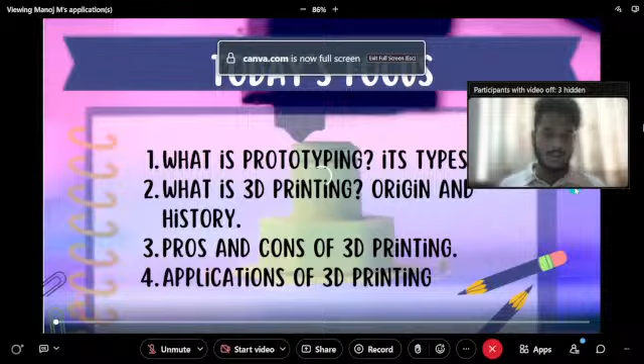Okay, so we have completed with the designing part, now it's about prototyping. So today we'll be focusing on what is prototyping, its types, and then what is 3D printing, about its origin as well as its history. Each and every component we use in our day-to-day life has some history behind it. Let's also look into the advantages and disadvantages of 3D printing, and then at the end let's discuss the applications of 3D printing.

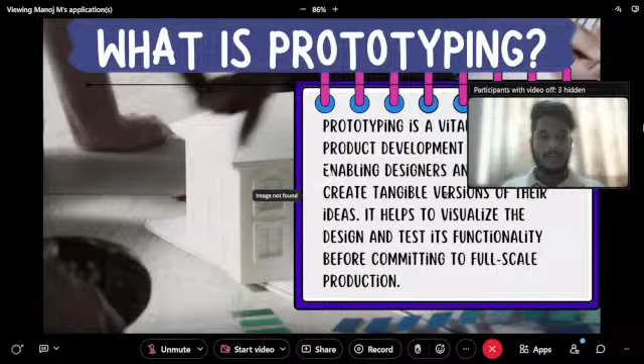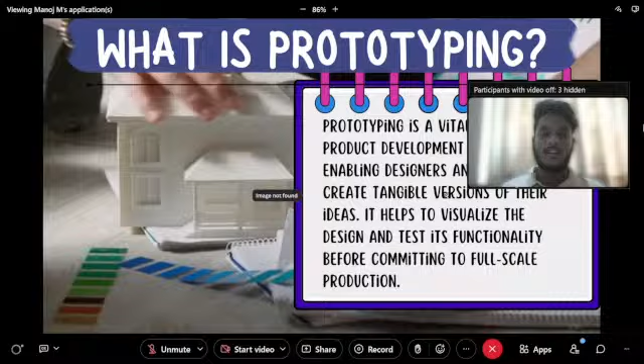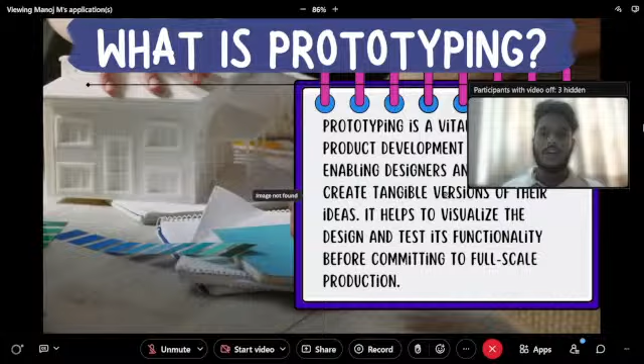So now does anybody know what is prototyping? If you know, you can drop some text onto your chat box. So yeah, prototyping is nothing but designing some machine, for example some car. For that car, we need to know how it works, because before sending it to a mass production factory, we have to test that particular car. That's how each and every machine in our day-to-day life has been manufactured. First they'll be making a prototype of that similar model, and only if that works, they'll move on to the full scale production part.

So now you know what is prototyping, and now let's see the different types of manufacturing. Among them we have two major types, additive manufacturing and subtractive manufacturing. In additive manufacturing, we'll be adding materials layer by layer and moving the manufacturing process ahead. In subtractive manufacturing, there will be a particular beam or sheet of material, and that material's edges will be removed to give shape to the machine. In additive manufacturing, layers are added one over the other, so there is not much material wastage. In subtractive manufacturing, you can see materials are getting wasted as we remove material to give it shape.

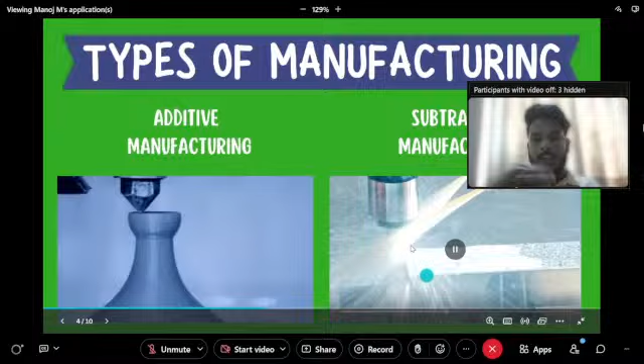Okay, so now we got to know the difference between additive manufacturing and subtractive manufacturing. Now moving on to the next slide.

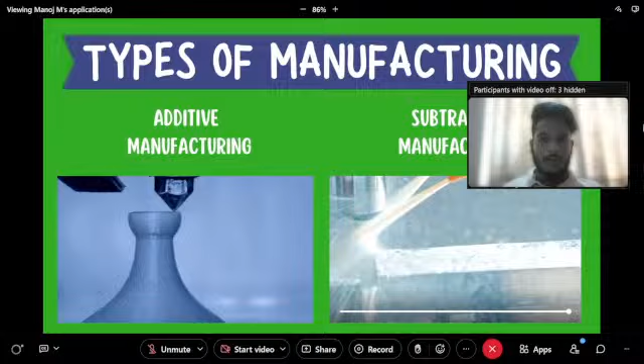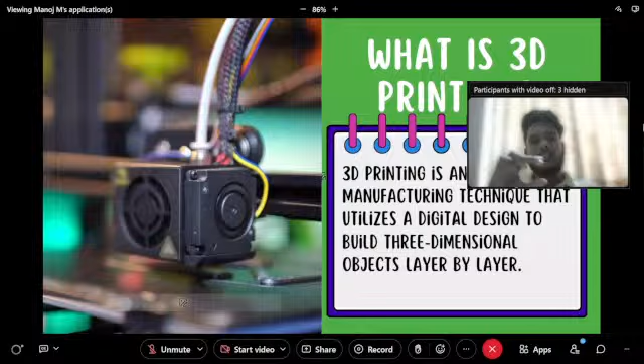Let's see what is 3D printing. 3D printing is an innovative manufacturing technique. Here what we do is take a 3D model, meaning it has length, breadth, as well as thickness, and we print that product. The product is manufactured in a layer by layer process: first one layer is printed, above that another layer, and so on. As we add layers, the thickness increases, and that's how we get the 3D printed model.

Now let's look into the history part. In 1983, Hideo Kodama had patented a model where he had manufactured using a resin.

Resin is nothing but a liquid. That liquid resin and some hardener will be put in and mixed together, and then they apply UV light, meaning ultraviolet light. There are different types of light rays from the sun - we have ultraviolet rays, IR rays, and multiple other lights. Using UV light, that particular liquid model was solidified. Solidifying means the liquid is turned into another state of matter called solid - liquid to solid.

Then in 1986, stereolithography was invented. Here what happens is they'll put the mold, and into that mold, some resin and hardener are put in. There is a laser light which travels across that model shape, and wherever the laser light falls, that particular portion becomes hard. So we can get that product out of that design through this manufacturing process.

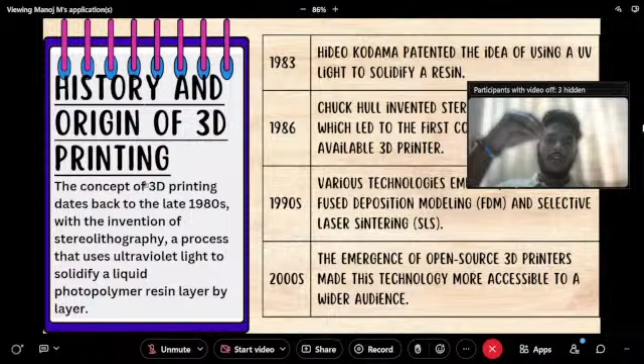In selective laser sintering, there is a powdered material which will be rolled into the mold - mold being the shape of that product. Onto that powder, laser light will be traced. When the laser light traces around that model, the fine powdered particles turn into liquid, and later on all those matters combine together and form into that particular model or product.

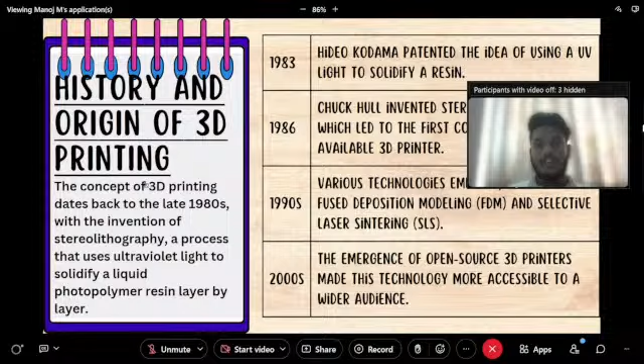Later on in the 2000s, the 3D printer was being manufactured on a small scale. The fused deposition modeling, which was huge, was made compact - meaning made small and handy. Those are the 3D printers available in your schools. A few schools are still not using 3D printers, but by the end of the session, you'll have some idea how to use it.

Now let's see the flowchart of the procedure for manufacturing. First we need the design. Where does the design come from? We have something called design thinking, where you find a problem, find a solution for that problem, and then design a product for that solution to work - that's the design thinking procedure.

For that design, if we require a 3D model, the first step we had done was 2D drawing - two-dimensional drawing - in the previous session. That two-dimensional drawing is done first, then out of that we make a three-dimensional model, in which we had used Tinkercad - though it's not just Tinkercad.

We'll also be using some softwares called Solid Edge, SolidWorks, Fusion 360, and CATIA. There are multiple designing softwares across the internet. So why am I choosing Tinkercad software? Because Tinkercad is the basic designing platform. Once you learn the basic concepts of designing using Tinkercad, you'll be able to do the next high-end softwares later on.

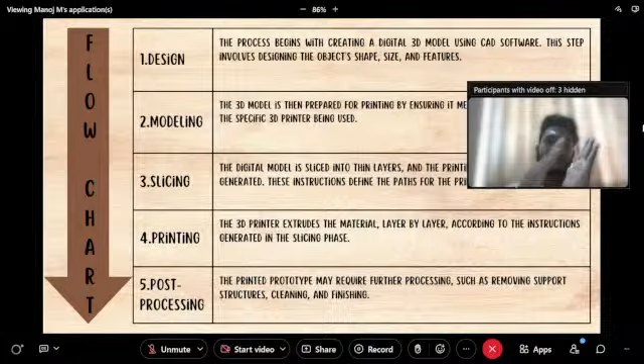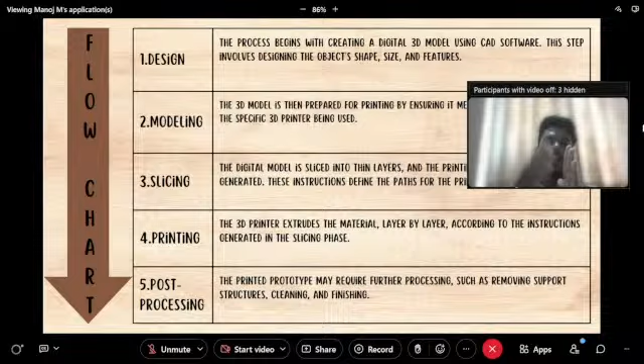You have mangoes and all, right? You won't eat the mangoes directly, you'll be cutting them. Similarly, we'll be cutting the design. If the thickness is so much, we'll be cutting it into slices, just like how we cut a cake. That's called slicing.

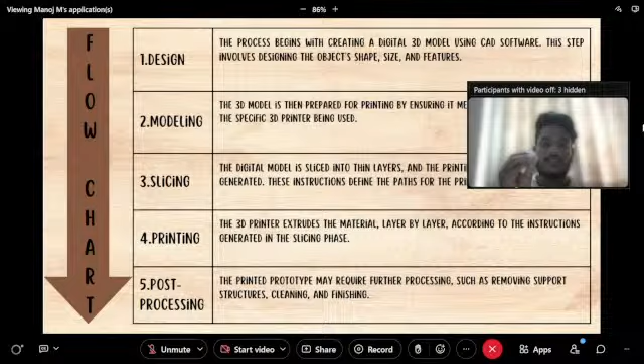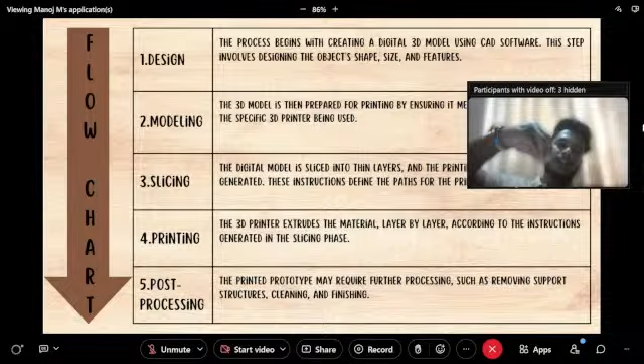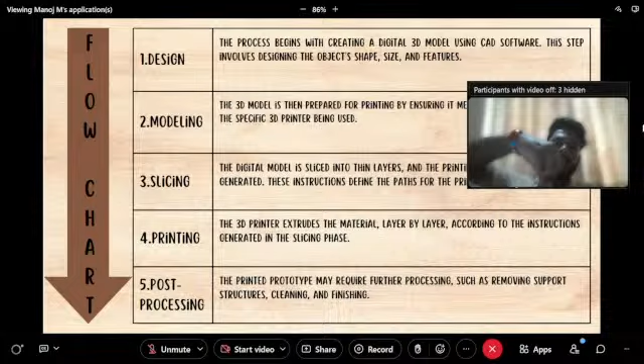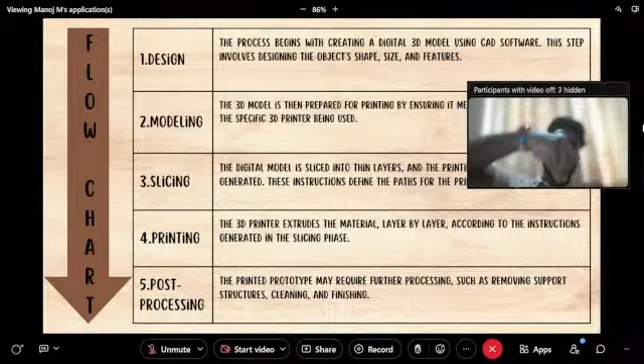Once the slicing is done, we'll give that product for printing. We'll take the G-codes, and using a pen drive, we'll transfer the G-codes to the printer. What the printer does is, in the slicing software, it generates a G-code in such a way that it tells where the nozzle and the bed should move. Each nozzle movement, which direction it should move to obtain that particular model, is decided using the slicing software. So with those G-codes, the nozzle and the bed will move, and once that moves, the printing starts.

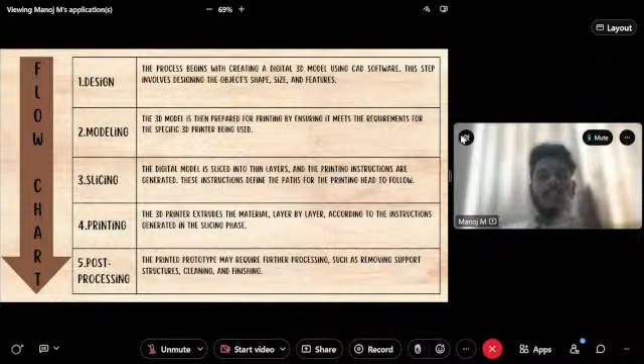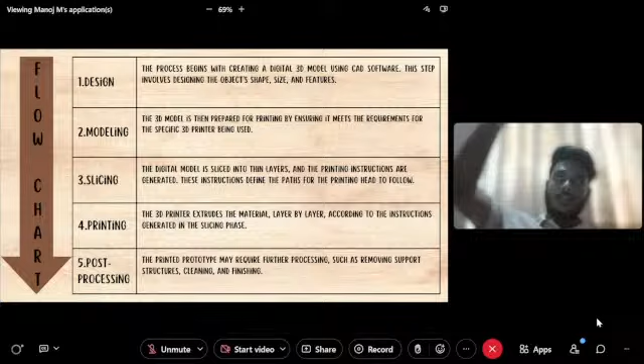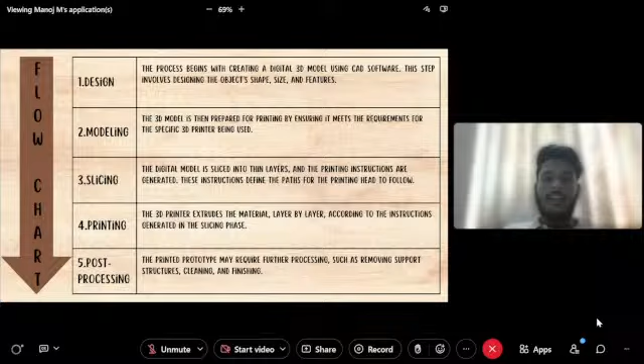Once the printing is done, the next process is called post-processing. Post-processing is nothing but removing some skirts or brims that were provided for holding the design onto the bed, and if there are supports, we remove those too. We give supports just like when building a home, you see some rods kept to hold the molding part until it dries. Similar kinds of supports are given in 3D printing also.

Now let's look into the advantages and disadvantages of 3D printing. When it comes to advantages, the first thing is rapid prototyping. Rapid prototyping means we can get the prototype done within a few hours. When it comes to other types of manufacturing like casting and molding, we need to prepare the mold first and then make the design, which takes about a week to get a prototype.

When it comes to 3D printing, we can get the model done within a maximum of 1 day. If it's complex, it may take 1 or 2 days. If it's simple, you can get it within hours. So what happens is we get an idea of how the final product looks like using a 3D printer. Got it? So the next thing is design flexibility.

However complex the design is, you can get it 3D printed easily.

Next is reduced cost. This applies just for making one prototype. With other types of manufacturing, it might cost more for just one model, and the amount could go even higher. So here, the cost will be low.

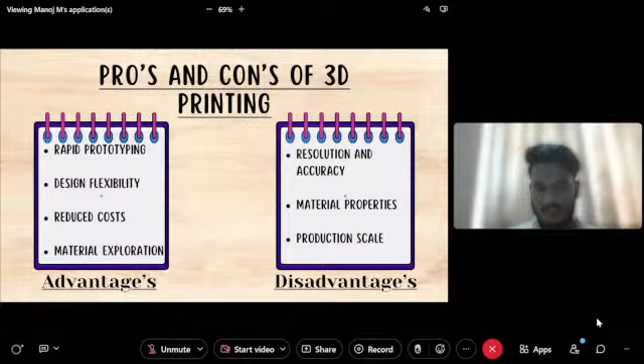So now we just saw the advantages and disadvantages. Now let's move on to the application part - for what purpose can you use the 3D printer, that's called application.

First is prototyping. If you want to do a major project and know how it looks in the final production, you can test it using the 3D printing procedure.

Next, healthcare. For example, if you are making a prosthetic hand or leg, all those things you can do using 3D printing.

Next, education. Now in all your schools we have 3D printing, right? That's also an educational part - we are learning hands-on experience using these 3D printers.

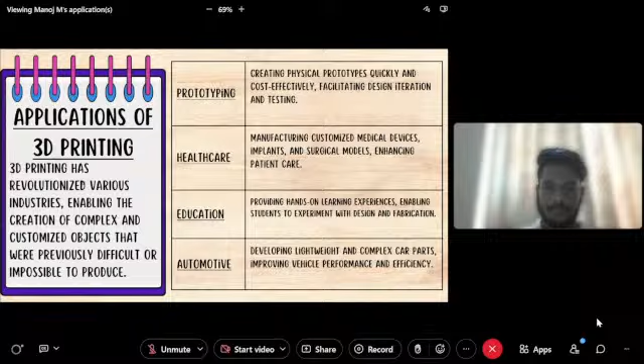Then when it comes to automotive, we can see dashboards and lightweight parts - all those things we can 3D print. So that's it for the presentation.

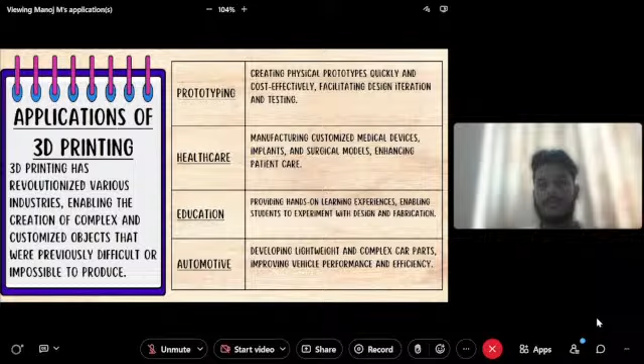Now let's move on to how we have to do the slicing procedure. Last week, what did we see? We saw the designing, right? So in Tinkercad, we designed some product here.

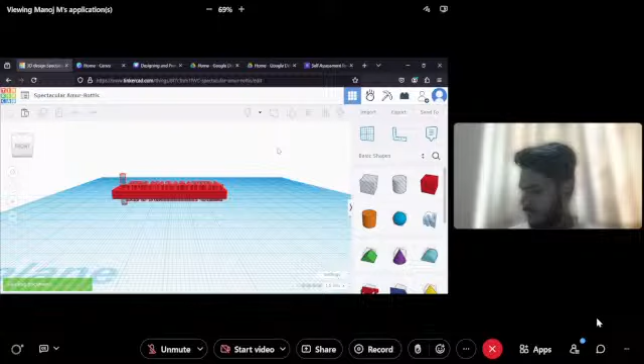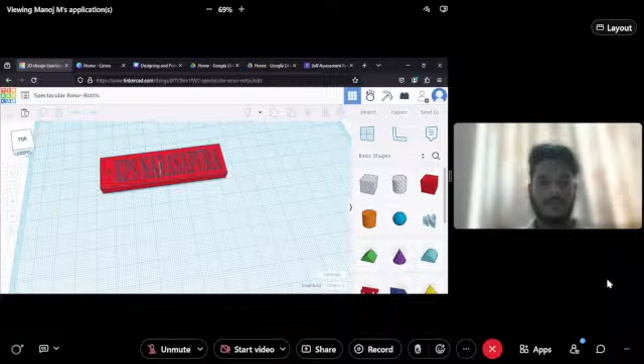So this was designed in our last session, right? We did it till here. Now what we'll do is I'll show you how to export this design, and also how to use that exported design for 3D printing. Let's move to the next part - this was the design we did previously.

Now what I'll do is go to the export option here. You have to click on export, then you can see options for 3D print. There are multiple file types like .obj, .gltf, and .stl. Most printers use the .stl file, so let's use that to download it. Now I'll download the file - it's completed now.

So then what you have to do is open the file. We had downloaded the model, right? So you have to click on that.

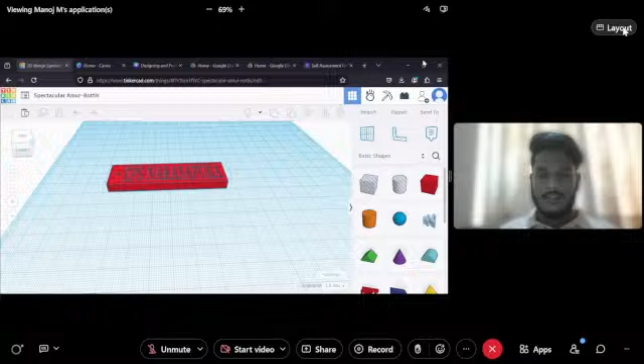Is the screen visible now? Yeah, now okay.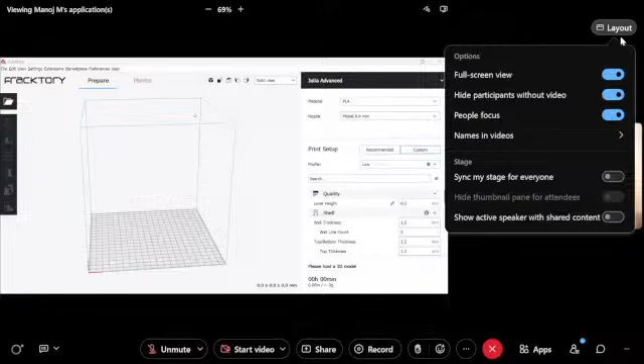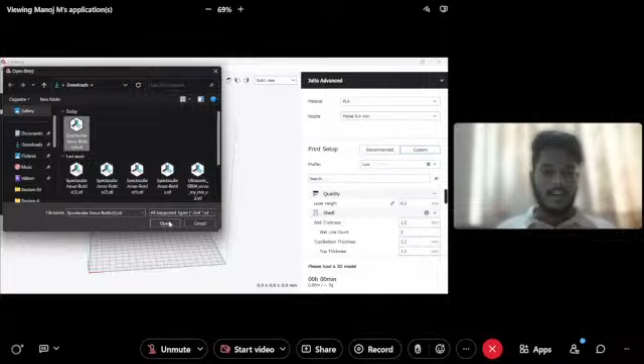So now this is how the interface looks like. Here you can see open file option. Once you click on open file, you'll see the downloaded file. You have to click that and open. That's it, so the design will be on this workspace.

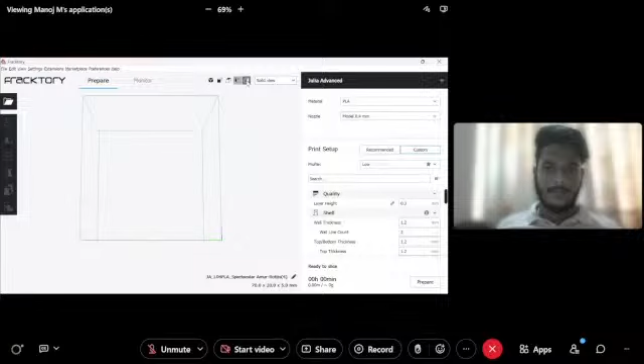Now let's see how to view it in different angles. Here you can see there are so many views. This is the front view, this is how it looks. This is the top view. This is side view, and this is the other side view.

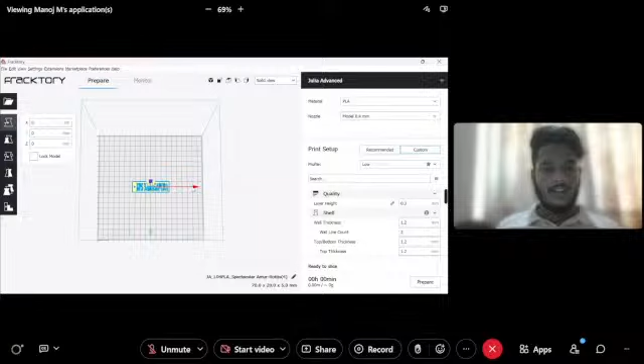Now let's open the top view and check. When I click on this, all these options get activated. This is the move option. Here you can see the arrow - you can click on the arrow and move it, and place it wherever you want.

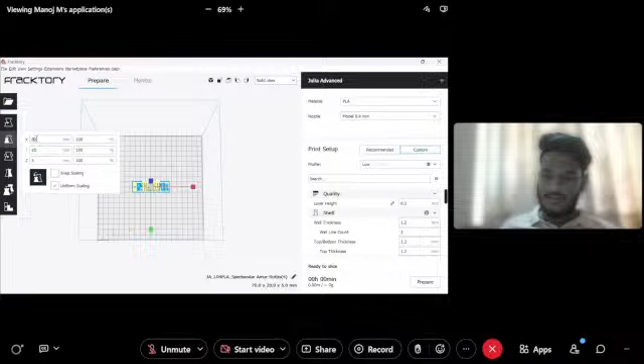Then there is something called scale. Scale is for increasing the size of the product. You can go here - the length was 70, right? Now I'll make it 80. You can see the length being increased. Now I'll set this back to 70. So here you can do the scaling part.

Then if you want to rotate that, you can rotate it in this way. Just rotate like this. Then give print command to the 3D printer.

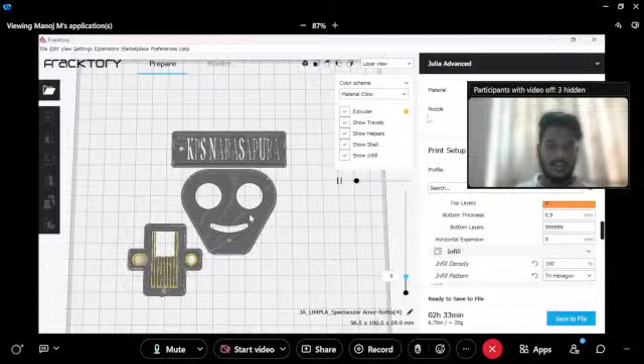Now I'll ask Venkatesh to share his screen. Yes, yes, Venkatesh, you stop the video. Yes, yes.

A student like you all - he does 3D printing and all in his school. So even you can also try all those things.

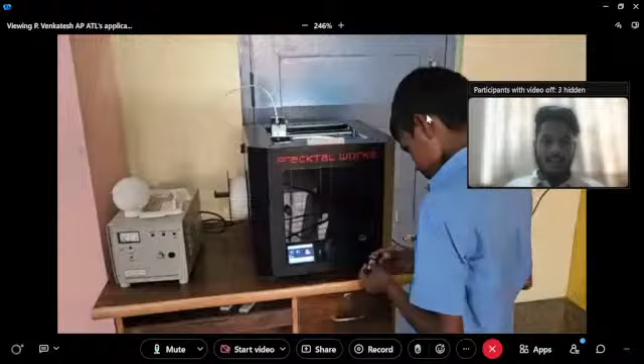So what I did, I just saved that file as G code and transferred it to the pen drive. Then I turned on the 3D printer and inserted that 3D printing pen drive.

Here I'll show you the settings options. In settings, you can see there are so many options available, like you can connect your mobile, and if you want to change your display, you can change your display theme. So all those things you have to scroll and check.

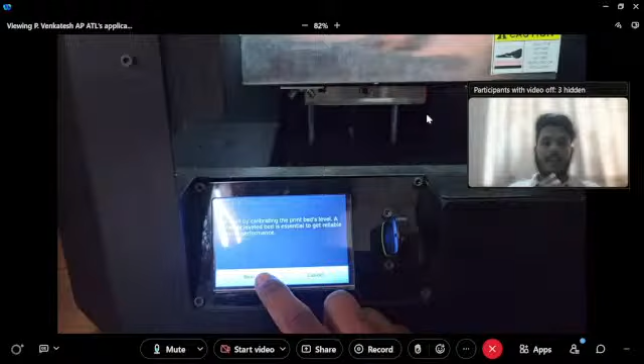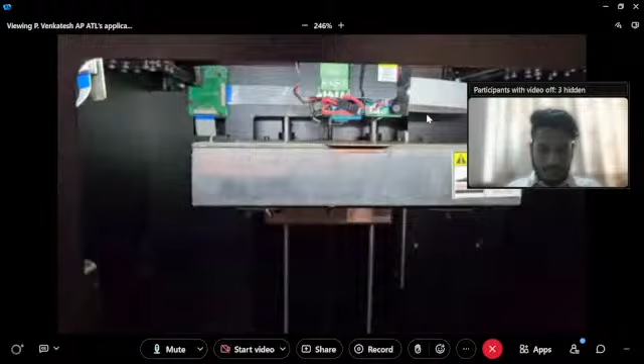Next part is calibration. Calibration is - for example, if it's not calibrated, what happens is, just imagine the bed... pause bro, touch bro. This is called the bed.

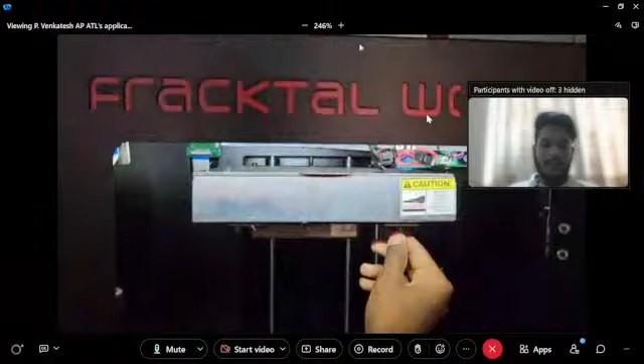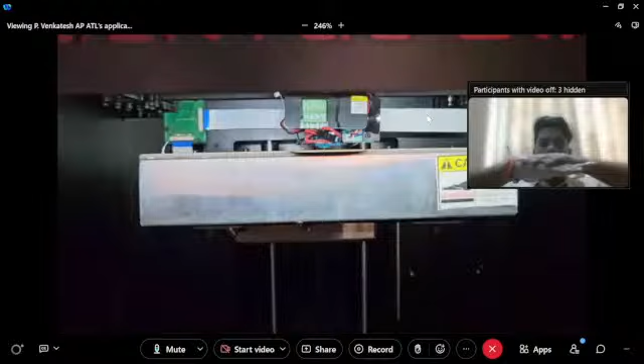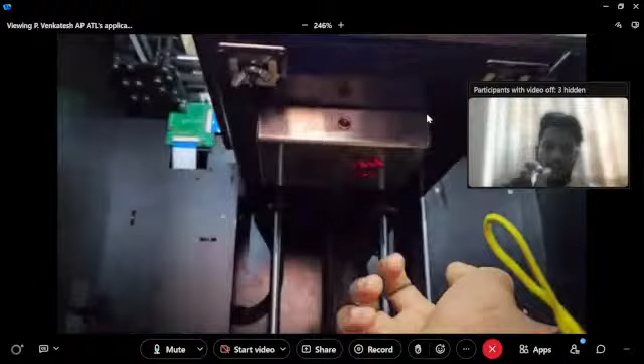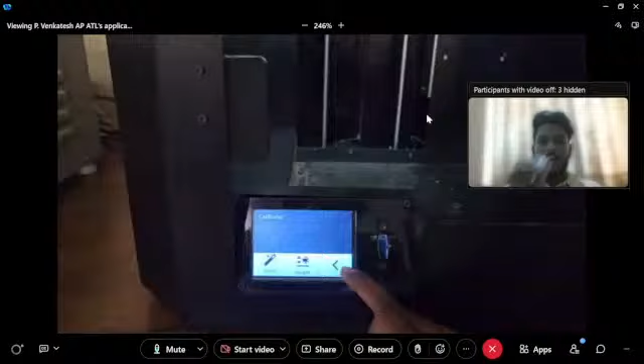If the bed is a bit tilted, the nozzle will be moving here and there. If it's not kept properly straight, the printing won't be effective. So there are screws - when you rotate those screws, this LED will turn on. Similarly, at all the edges there will be screws. You have to screw it up and see if the LED is turning on.

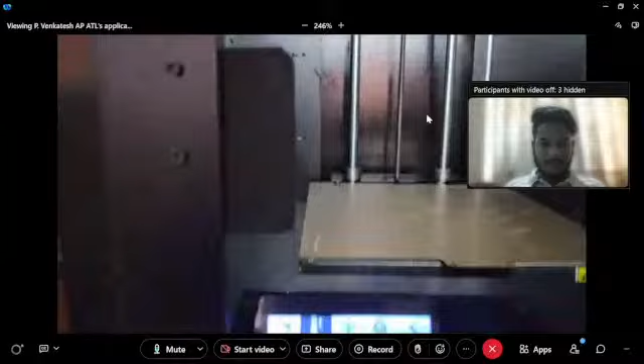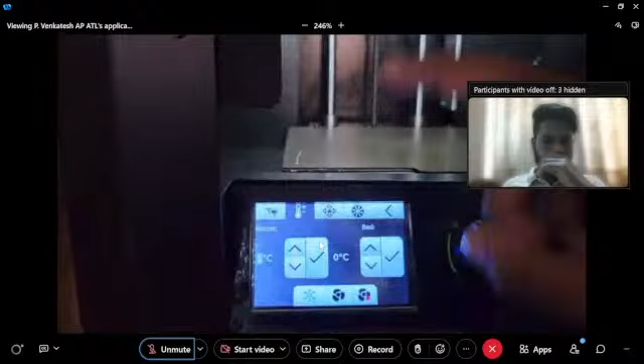Now we will see how to set the temperature. This was the nozzle, this is the bed. Both nozzle and bed will have some temperature. The nozzle will be around 220 to 240 degrees Celsius for PLA material. When it comes to the bed, it will be around 60 to 80 degrees Celsius. You have to set that and leave it.

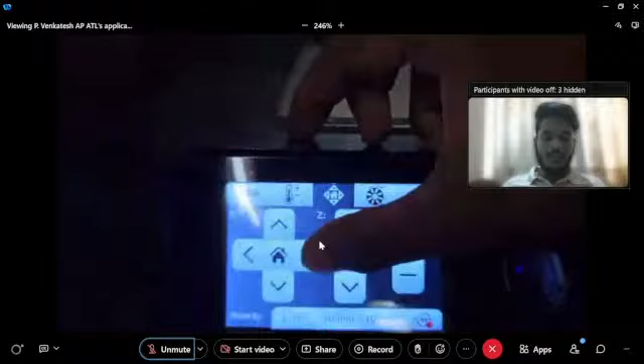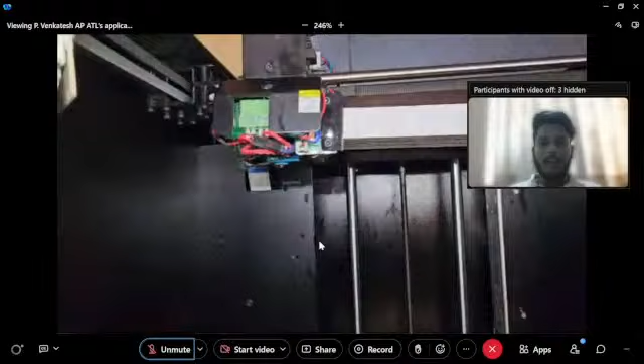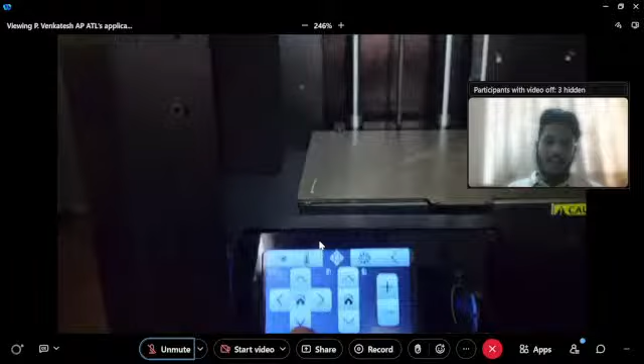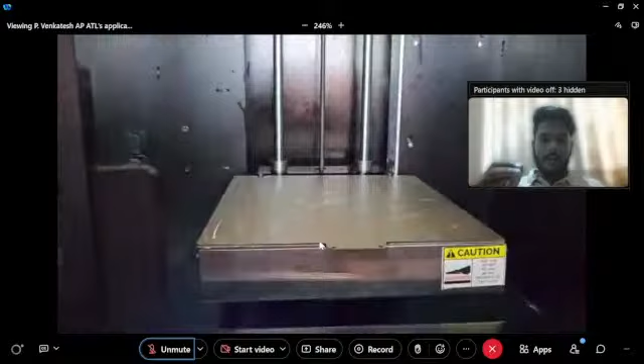For the maintenance part, there's something called WD-40 spray. You have to put that spray on the places where the nozzle is moving and the bed is moving. All those spaces you put the WD-40, and then move it using the move options. So now you can see it's moving - I'll put the WD-40 here and then move it. I had already put it, that's why I'm just moving and showing it to you.

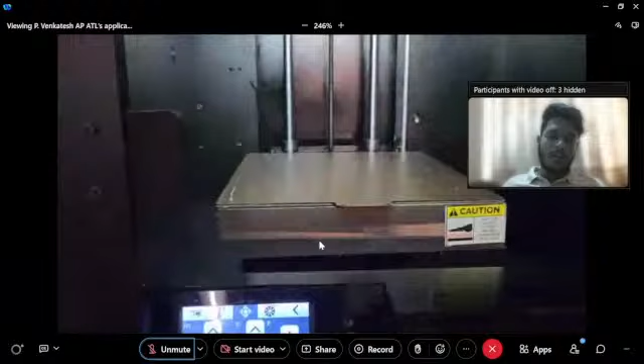So you have to put it in the moving parts, all those screws and all, and you have to spray that and move it. So what happens?

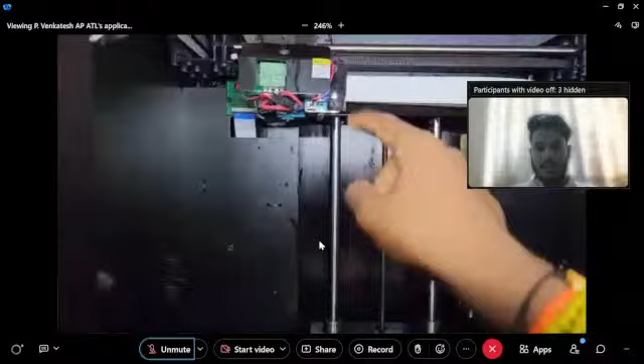We can avoid the rusting. Rusting is nothing but the material getting weakened by rust. So what happens after rusting? It will remove the top layers and it will get weakened.

Now I'll show you how to load and unload. This is the loading part. Why was the loading done? For removing the filament and adding the filament.

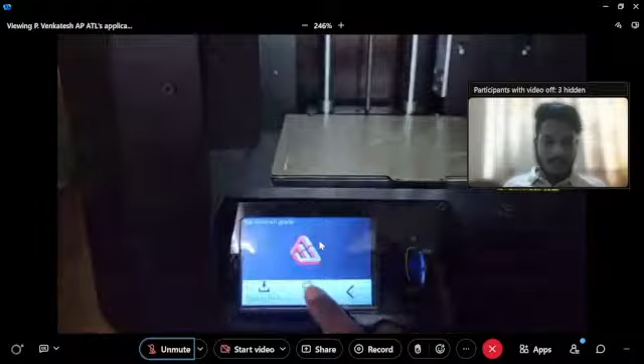Now I'm just showing how to print for the 3D print.

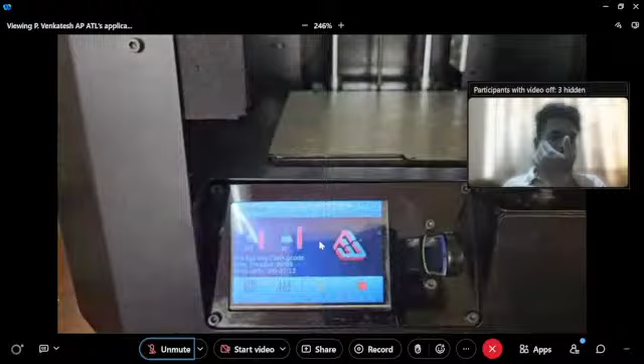I clicked on that portion and then selected the file and then gave it for printing. Once the temperature goes to 220 degrees Celsius, the printing will start.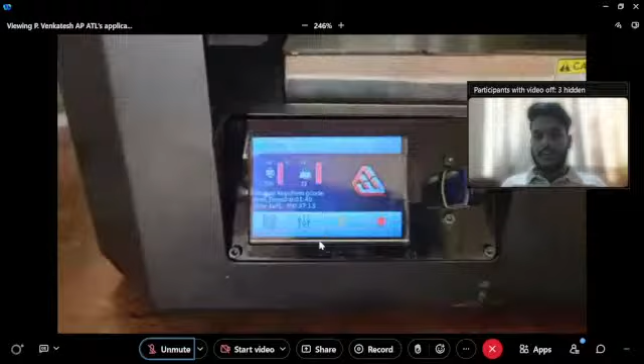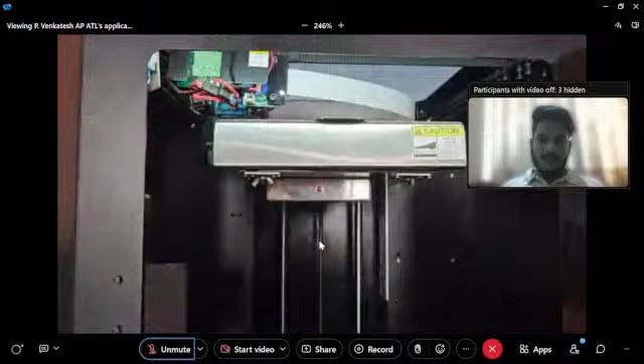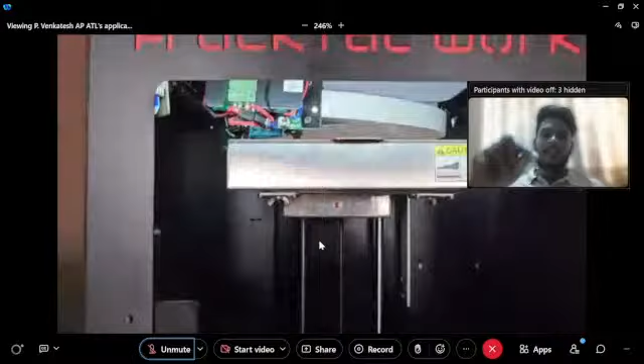So now the printing will start. Initially it will mark the edges, keep a point and go. You have to check whether the filament material is being deposited on that point. If it's not deposited, then you haven't calibrated properly.

So all those dots it's keeping, that's calibrating itself.

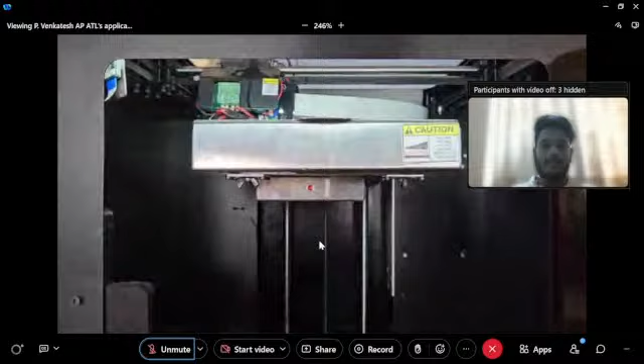It's such a wonderful machine, right? Once calibration is done, it will come to its home position and then start the 3D printing procedure.

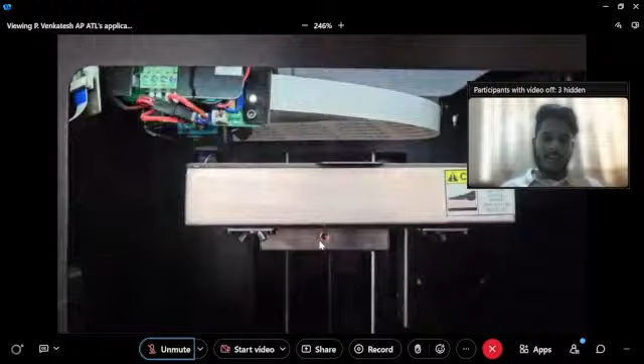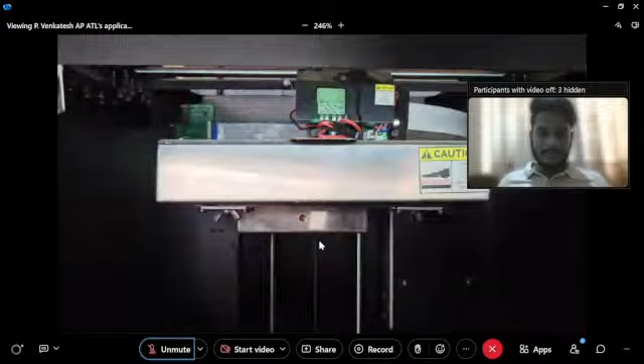Now see, the printing has started. The first layer will be the skirt or brim, which is for holding the support.

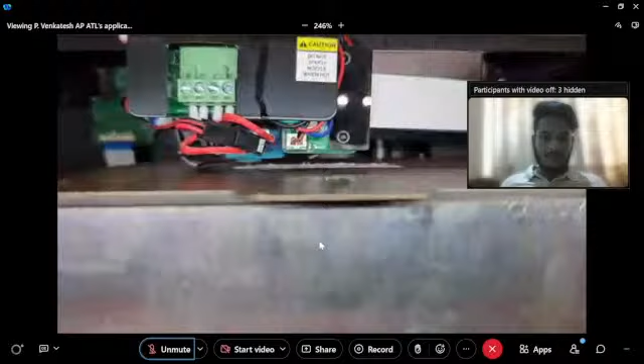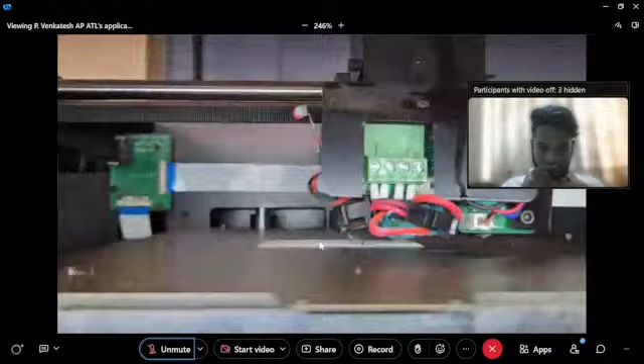I'll just show you now how the layers will be formed. Now you can see the thickness will be increasing slowly. Gradually the thickness is increasing.

Can you see that? So that's how the 3D printing works.

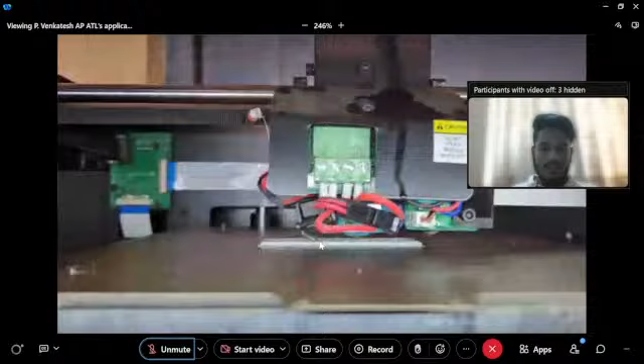So while removing also, you have to wear gloves for safety, or else your hand will get burned. After printing, after a few minutes, you can go and remove it.

So there you can see at the edges and all, there are some extra materials. All those extra materials we have to remove. That is called the post-processing part.

So this is the complete manufacturing process, right from the designing to using the 3D printer.

So now what I would like to say is that you have to keep safety precautions as the first priority, and then you have to work on this. When the bed and the nozzle are getting heated, you shouldn't go and keep your hand and touch it.

You might end up burning your hand. So please take care, these are the safety precautions while using the 3D printer.

So there's nothing much with the safety. Only thing is that when it's hot, you shouldn't touch.

That's it. And while removing also, once the printing is done, after 5 minutes, you can just go and remove it using the gloves, or else your hands might get burned.